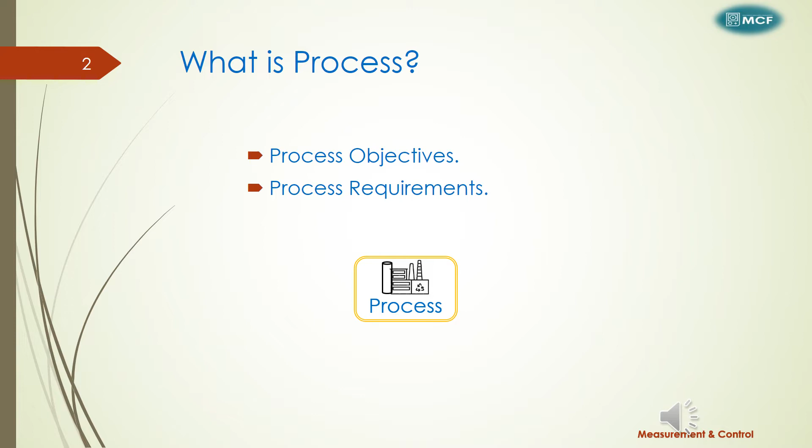In order to define the term process, let us consider a block diagram for the process. The process is composed of different types of units and equipments. These units and equipments, for example, reactors, pumping, heat exchangers, distillation columns, compression tanks, vessels, heaters, boilers, are assembled and connected together in such a way to produce the required output.

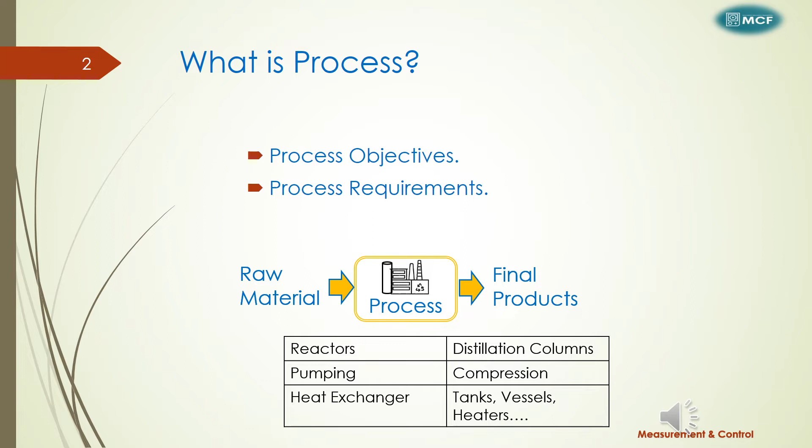So what is the objective of a process? The objective of a process is to receive raw material. This raw material will be processed inside the process itself to produce a final product in the most economical way. In order to achieve this objective of the process, we need to meet some requirements.

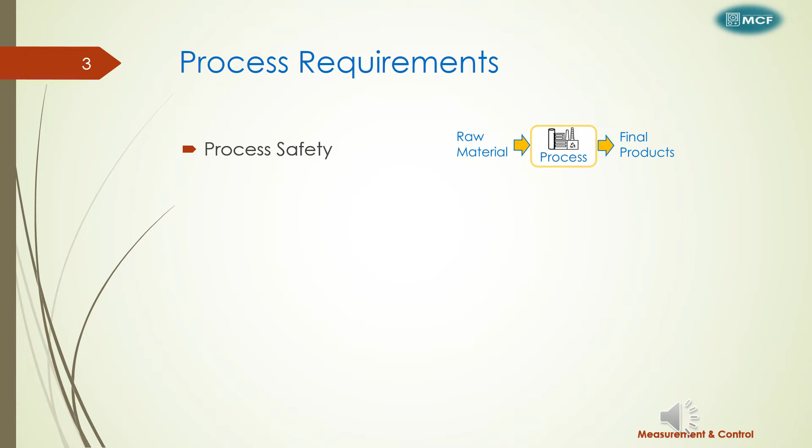The first point is process safety. In this issue, it is very important to study the hazards associated with the process and to estimate the risk and its consequences in order to prevent fire, explosion, and or chemical releases, which are commonly found in the chemical plants, refineries, oil and gas production facilities for both onshore and offshore.

The next point is operational constraints. It is important for the operating conditions of the process to be kept and maintained within specified limits to avoid conditions like overpressure, over temperature, overfilling, and so on.

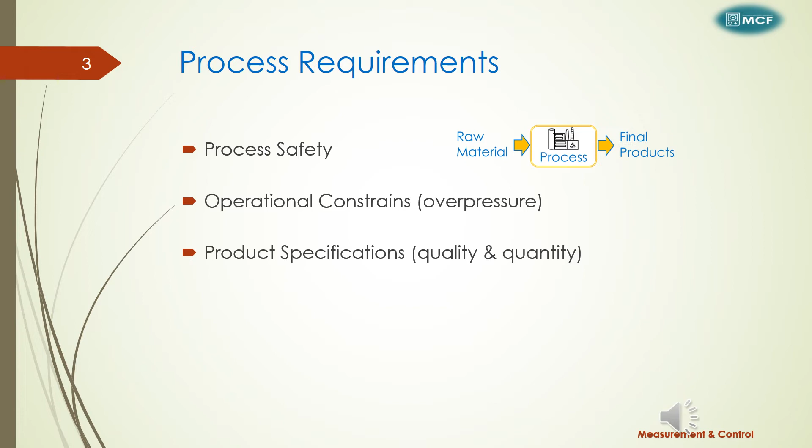The next point is product specifications in terms of quality and quantity. Also, the environmental requirements in terms of gas emission to be monitored and controlled to be as minimum as possible, in addition to the economics in terms of minimum operating costs with maximum profits.